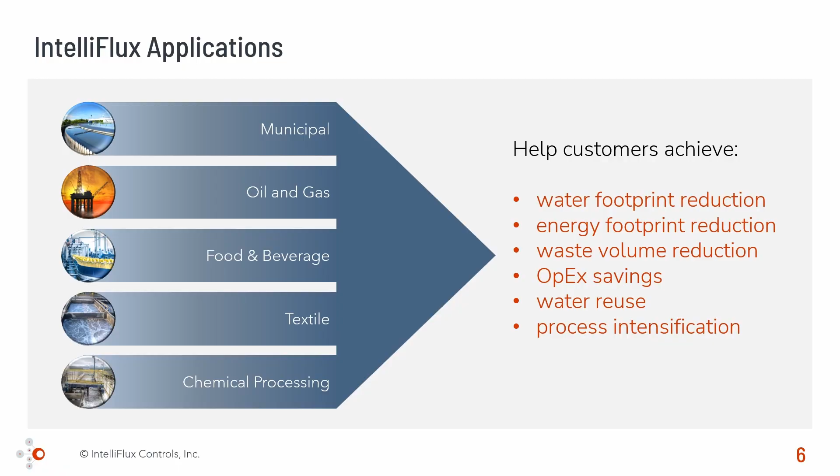The steps that are involved in IntelliFlux engendered digital transformation are as follows. The philosophy of IntelliFlux is based on closing the IDKW loop. IDKW stands for information, data, knowledge, and wisdom. So what we do is we collect all the information from the plant that are embedded in its automation system, like the SCADA, operator actions, etc., into a single database or source of truth.

We process these data continuously by comparing them with models of the plant, which we call our digital twins. We then use machine learning and predictive models to create wisdom by comparing the digital twins with the real plant data and deliver this wisdom to the plant as operator instructions or autonomous set point management for the plant.

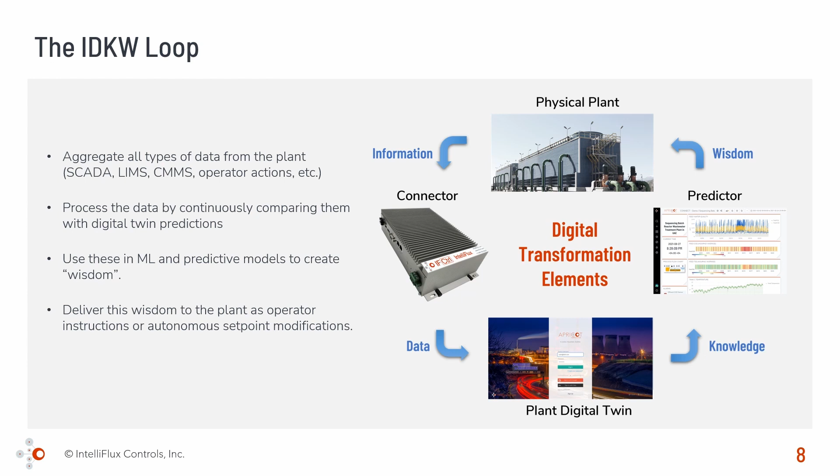How we deliver it is essentially by helping our customers achieve this journey of taking their existing plants to what we call the smart plant of the future. This is done through a combination of digitalization steps as well as implementation of the Industry 4.0 design concepts through our 3 tiers of product, Connect, Assist, and Operate. The idea is that Connect provides digitization, connection of the operating technology layer of the plant with the IT, and providing visibility through unified web-based dashboards.

Then with Assist, we provide elements of transparency and decision support, which are 2 key elements of providing advanced level digitalization guidance based on data analysis, predictive analytics to provide wisdom, process insight, and foresight as operator support or decision support. And then finally, we achieve the last level of automation, which we call adaptive closed loop control or decision automation through our Apricot Operate product.

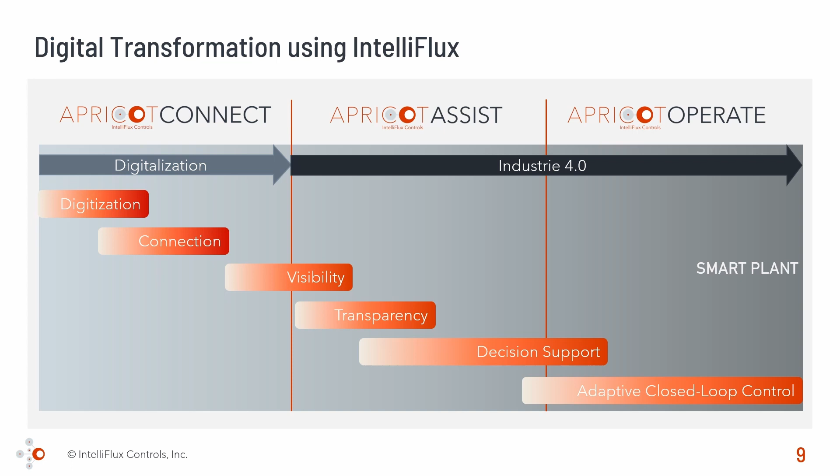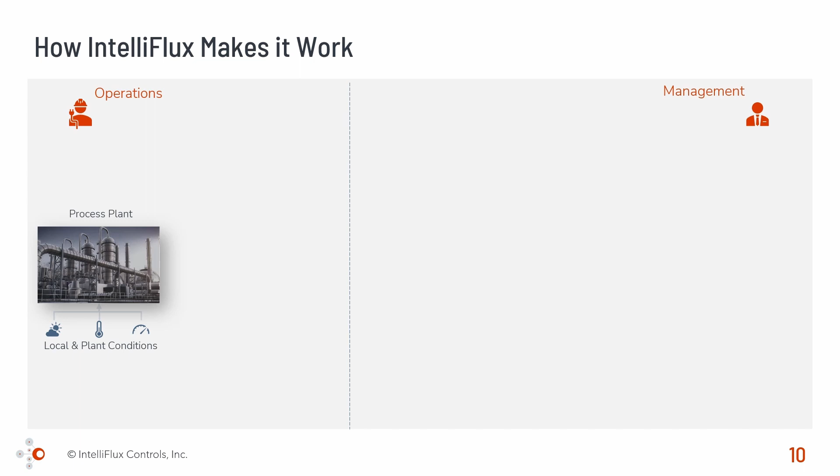Here is an architecture of a process plant which is perturbed by its local conditions and is managed by the operations team, and it is separated by this vertical line from the management, which often does not have a direct visibility of the plant. IntelliFlux connects an edge device to collect all the sensor data from the plant and puts it in a secure database, which is often located in the cloud. And this is what we achieve with our product Apricot Connect. It just extends the SCADA historian to the web and makes it accessible to everyone in the company.

Then we connect the database to what we call our decision engine server, and that decision engine server compares the plant data with models that are called DUOs or digital unit operations, which are IntelliFlux's developed product suite of unit operations or digital twins for the processes that represent the plant. So we continuously perform this comparison between the actual plant data and the models with our AI, ML, as well as various types of optimization algorithms, and we collect this information into a knowledge base which we call SAGE.

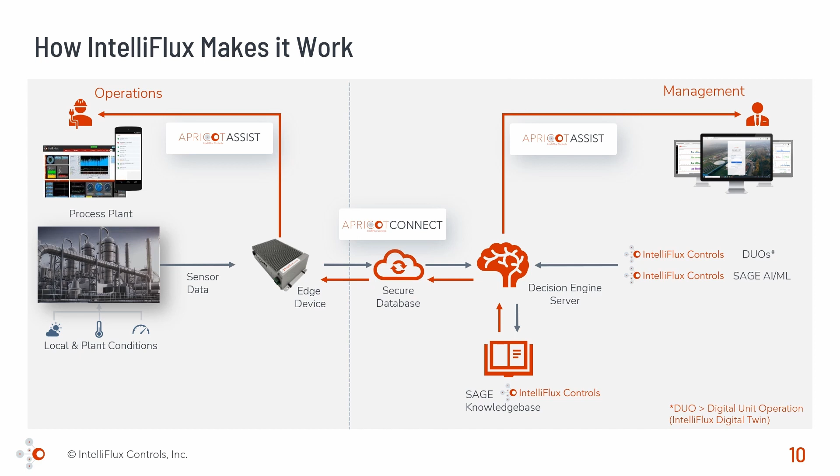Now this knowledge base provides process-specific instructions and wisdom to the operations team at the plant, which is delivered through the edge device and in various devices or screens that are available with the operators. The information from the knowledge base is simultaneously sent to the management team, which could be the sustainability group or the people who are experts at the headquarters of the plant. This allows simultaneous viewing of the data by the operators of the plant and the management. There's a final step that IntelliFlux also achieves in its technology, and that is in the lower left corner.

You will see that we deploy Apricot Operate to perform what we call closed loop autonomous set point adjustments. Here we take the same wisdom that we were sending to the operators. This time the information is directly sent to the control system of the plant, the PLCs. This allows you to deliver a fully autonomous autopilot-like operation of the plant. This is the ultimate realization of Industry 4.0 that we achieve.

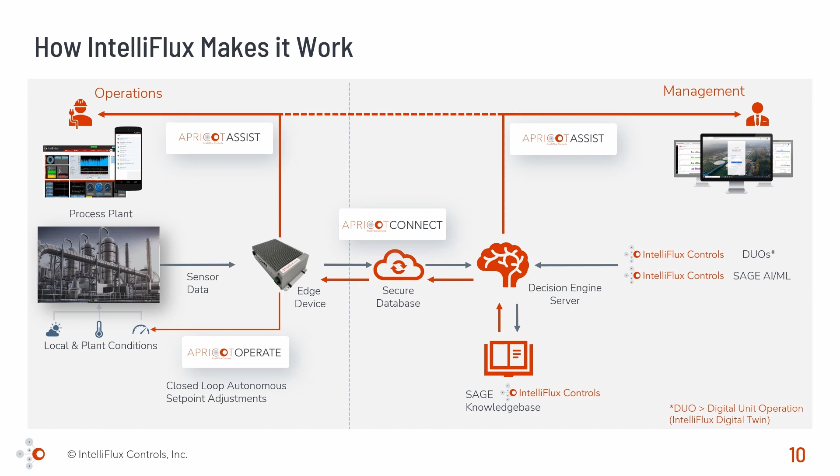The fundamental mechanism by which we deliver our results in the existing plants and in our technology stack is through digital twin models, which we call DUOs. DUO stands for Digital Unit Operation. These are physics and chemistry based models. They are dynamic, that means they are time dependent and can process transient data. They can be connected to the live data feed from the plants.

They provide near real-time comparison between the simulations from the DUOs and the actual unit operation performance from the plant. These DUOs can be operated in various modes like the simulator mode, the optimizer mode, and as drivers of the state space models of control. We provide predictive guidance as well as model predictive control by the help of these digital twins.

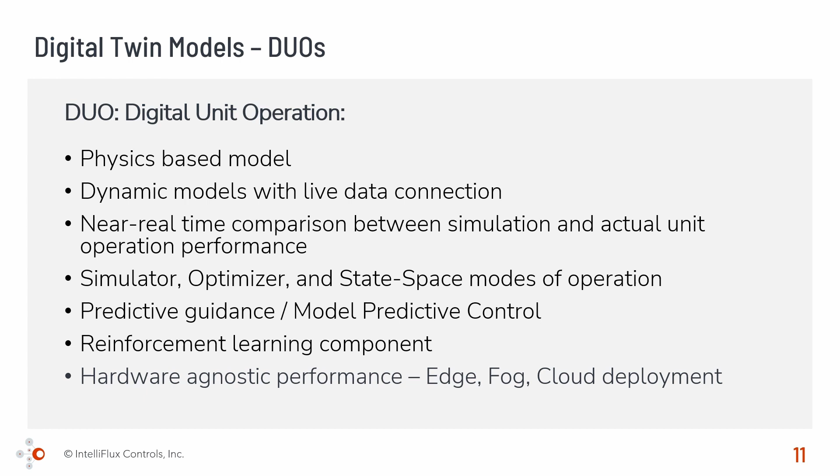These digital twins also allow us to deploy reinforcement learning in our AI ML components of the software, and the digital twins are absolutely hardware agnostic. We can place the digital twins in the edge, in the fog, and in the cloud. We do not have to worry about the architecture of the computing system. We can put it anywhere for deployment.

Now the digital twin embeds the dynamics of membrane fouling and can model how the membrane deviates in its permeability from baseline, and that is used to perform various actions like cleaning and CIP of these membranes.

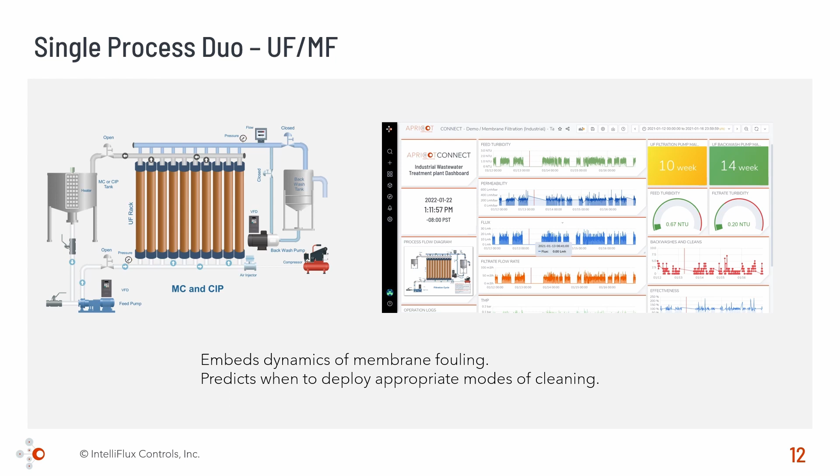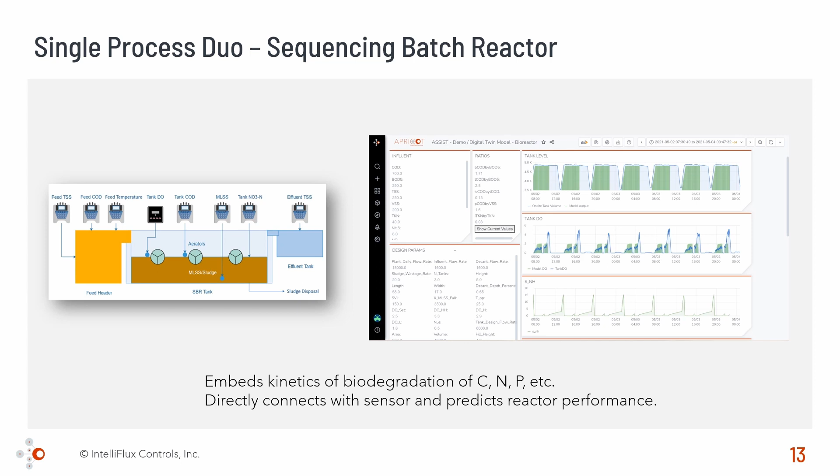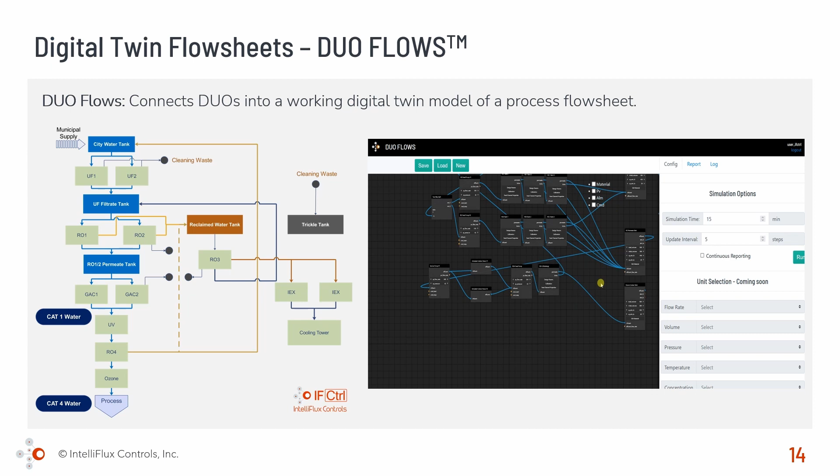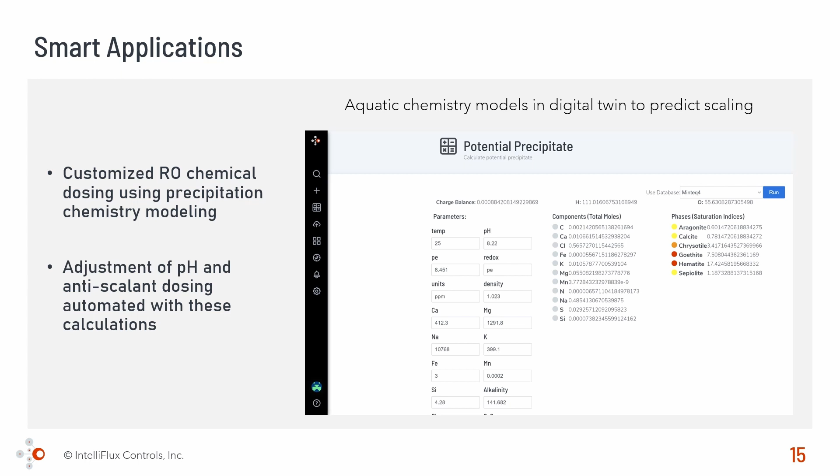And you can dynamically put in all the parameters that guide this and then run the simulation and can do scenario analysis as well as drive this digital twin as a driver of the automation system for the plant. For instance, in our RO digital twin models, we have included models of aquatic chemistry based precipitation to provide ideas of pH adjustment or when a scaling will happen to the RO module, as well as how to adjust anti-scalant dosing.

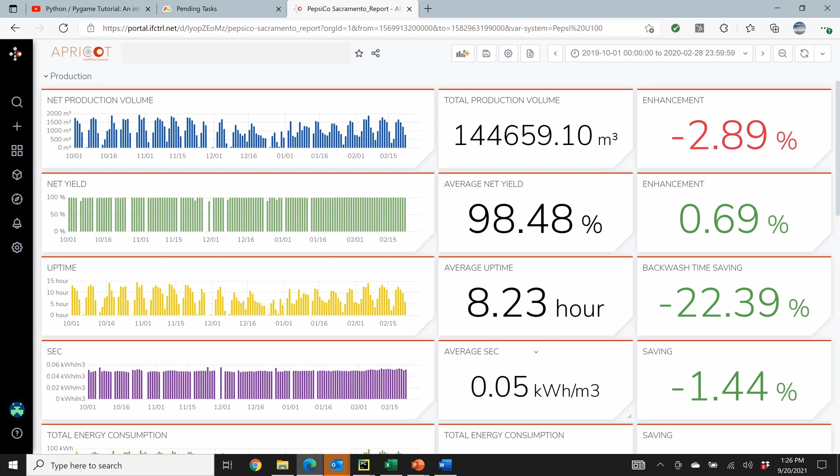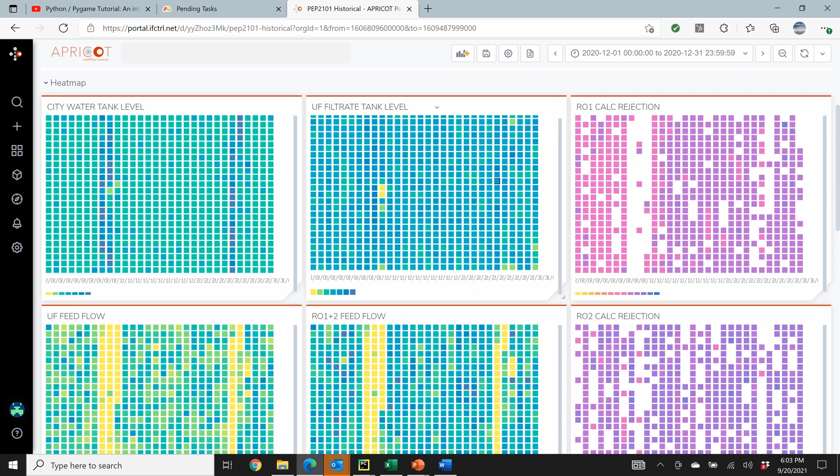Here is a screenshot of the Apricot portal, which basically shows you can open up any dashboard and you can see in real time what you're observing with the plant. You can perform higher level of data aggregation and show heat maps and other things that provide various types of correlations with weather conditions or upsets or various kinds of water quality excursions, etc. And these are mined with our AI algorithm to provide advanced level analytics for the customers.

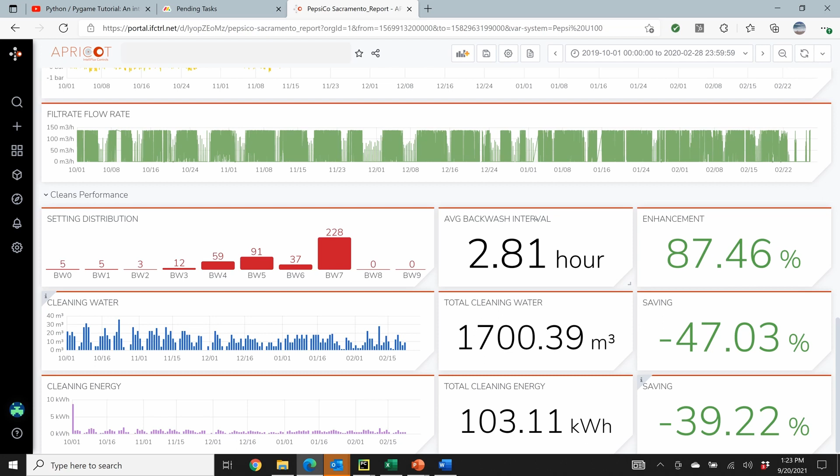We can run this and see the behavior of the control with the KPIs or key performance indicators, which shows how much enhancement in backwash interval has happened, or what is the savings of cleaning water, what is the savings of energy in these types of operations.

In wastewater treatment, when we go and deliver it to submerged membrane bioreactor systems, we have often observed reduction in specific energy consumption, increase in filtrate flow rate or yield, and savings in chemicals like bleach and citric acid, and most importantly, a significant enhancement in membrane life. This autonomous operation of these MBRs has extended the life of the membranes by reducing the irreversible fouling of these membranes through intelligent mode cleaning and backwashing.

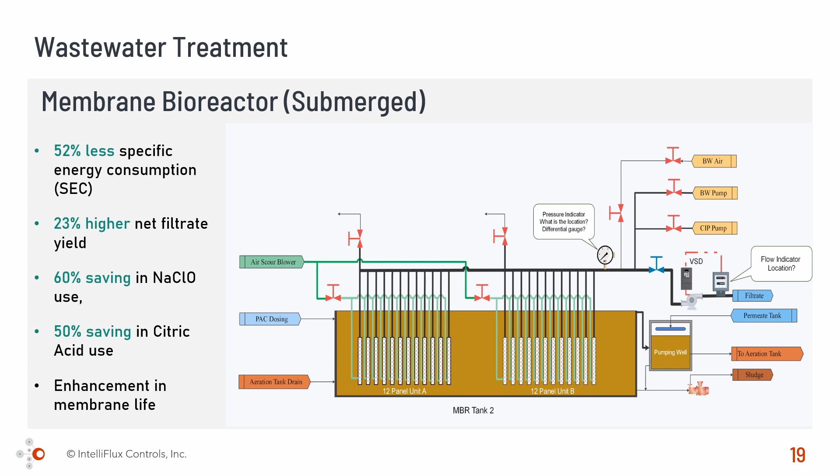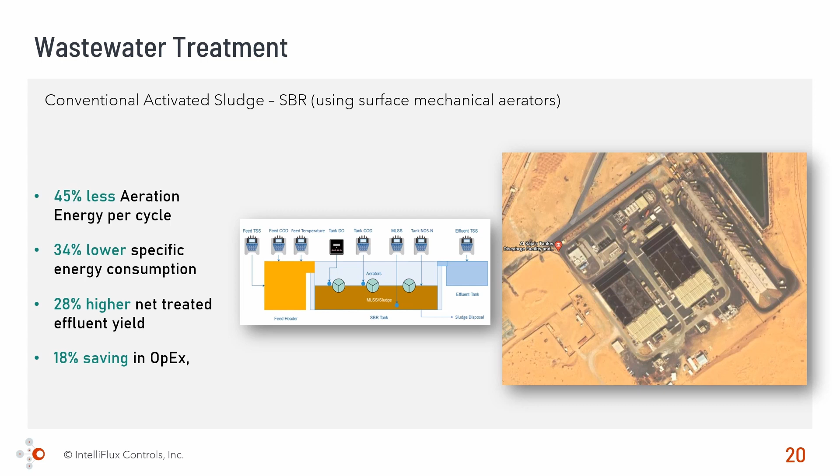When we apply these to various types of bioreactors, we achieve 40 to 50% less aeration energy demand per cycle because we can match the specific aeration demand for the COD of the system at any given time in the reactor. This allows us to get lower specific energy consumption, higher net treated effluent yield. We have managed to reduce upsets in these reactors quite dramatically, and we can give quite a bit of savings in operating expense for these types of systems.

We have also applied this in seawater reverse osmosis systems, and we have increased the overall yield of the seawater reverse osmosis plant by changing upstream behaviors of coagulant dosing, changing the residence time in the multimedia filters, etc., by using antiscalants and biocides, etc., before the RO with remarkable effects.

In these cases, for instance, in this plant, there was a huge problem which led to fouling of the RO modules and cartridge filters. Before we installed IntelliFlux, this plant was replacing cartridge filters once every 4 weeks. Once we went into this plant, the cartridge filter replacement time became 10 weeks overnight after IntelliFlux started taking up the operations. That's led to a huge OPEX saving.

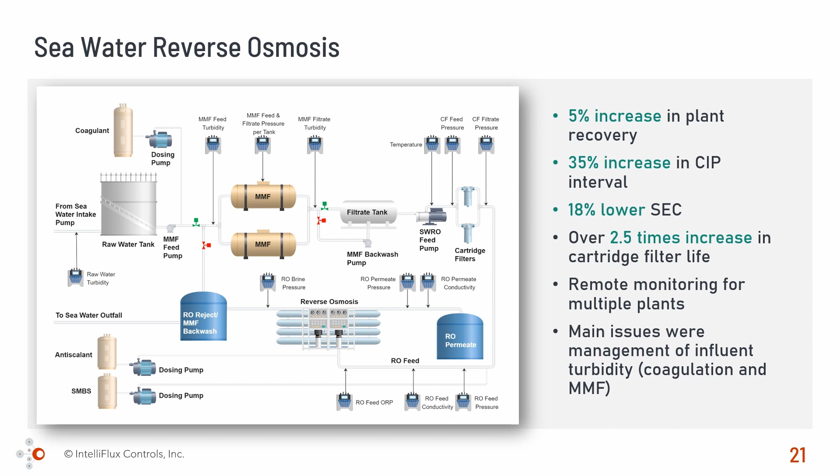Moreover, the RO plant operator was actually able to get advanced notifications up to 3-4 hours in advance when there was an influent water quality surge or water quality excursion that happened. This allowed the operator to manage the reverse osmosis plant's fouling behavior with a lot more confidence and effectiveness.

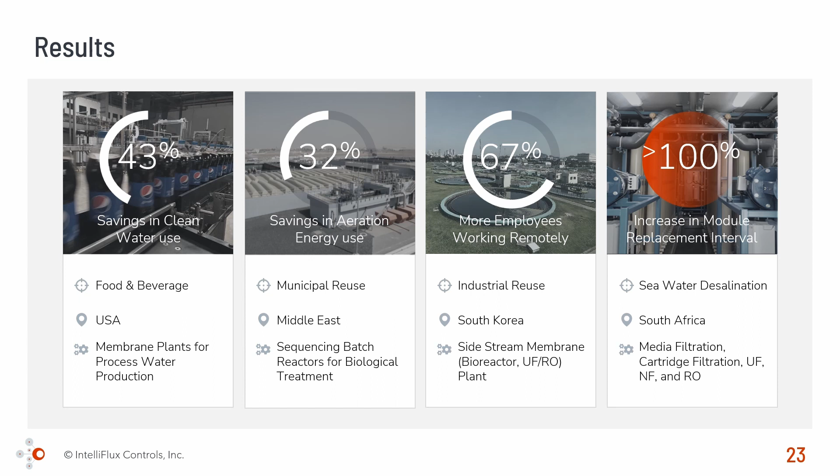The key results that we obtain when we deploy a digitalization solution like with Apricot, we get across the board significant savings in clean water use, energy use. We have reduced the number of employees who are working at the plant site, and when we have membrane operations, we have increased the modular cartridge life replacement interval quite dramatically.

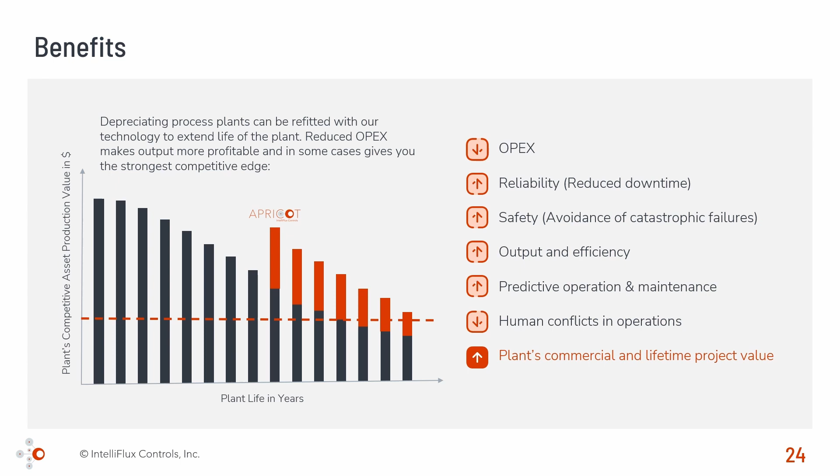The big benefits when we go to these brownfield retrofit plants is that these plants normally show a depreciation, and their cost for operating increases, which basically means that their profit margins reduce over the life cycle as the plant life increases. So when we introduce Apricot to these plants at a later stage of their life, we see an increase in the efficiency of the plant, which translates into better operating cost management for these plants and an extension of the life of the plants. So these manifest as a variety of improvements for the plants over the remainder of its life, and it increases the plant's commercial and lifetime project value.

IntelliFlux provides an amazing opportunity for process industries where our customers have existing plants where they can deploy IntelliFlux as a retrofit upgrade. Then when they are convinced about the benefits of IntelliFlux with their existing plant, a lot of them specify IntelliFlux as the automation code developer for their new plants.

And with appropriate engineering decisions and coding, we can develop the smart plants of tomorrow where we reduce the upfront automation integration efforts by about 70%. We deploy the digital twins from day one, and we can deploy the full mode of Industry 4.0 smart process plant control philosophy in these plants.

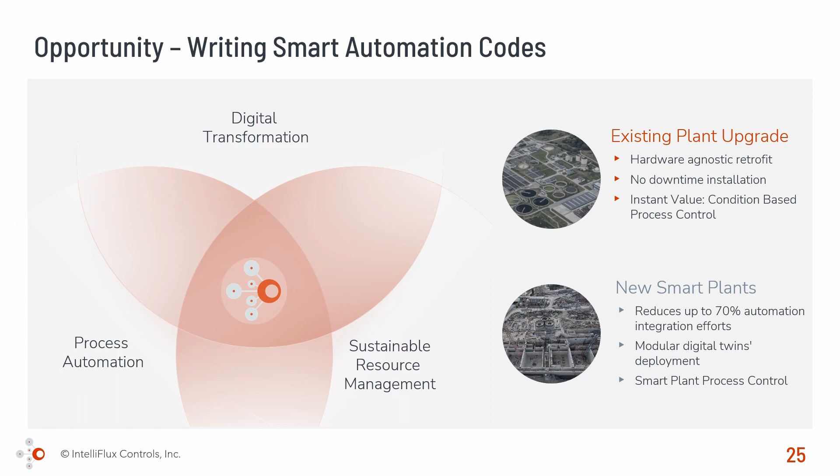Our closing thoughts about this should touch a few challenges that still need to be addressed for future deployment of these and for full implementation of autonomous smart plants. These are: you need a systems engineering approach. Only water treatment engineering will not work. We need process control, automation, sensor technology, data science, everything to collaborate to develop the codes for the future plants.

What will be the leading technology in automation? There is a little lack of clarity still today, whether it will be digital twin, physics-based modeling, or machine learning, which is data-driven modeling. So far, we understand that data-driven modeling provides results much more slowly, and it consumes a lot more data than a digital twin-driven model for process control.

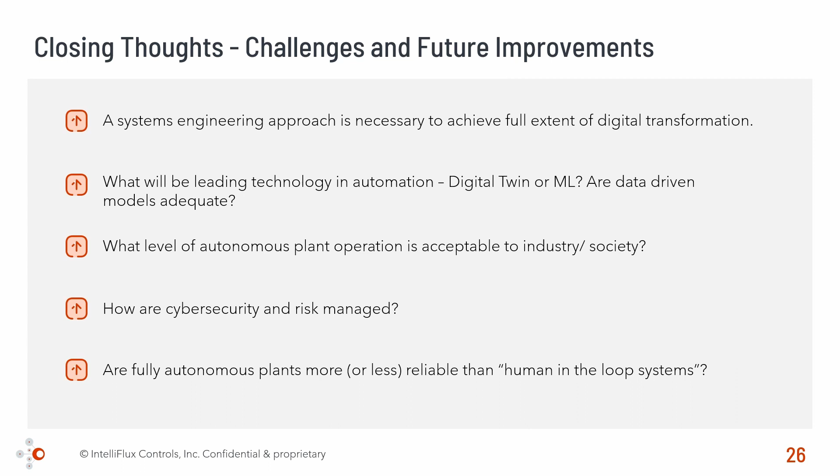We don't know what level of autonomous plant operation is acceptable in industry and society. We see variations in different countries, different regions. So there needs to be some societal acceptance for making these plants completely autonomous. We have a huge concern about cybersecurity and risk management when you have autonomous plants. And finally, we don't exactly have consensus on whether fully autonomous plants are more or less reliable than human in the loop systems.

In conclusion, however, one of the things that is becoming totally clear is that the modern process control and smart automation will involve this basic closing of the DIKW loop in a device agnostic way so that people can reach the data, understand the analysis of the data, and find out solutions from anywhere, anytime, and most likely as quickly as possible.